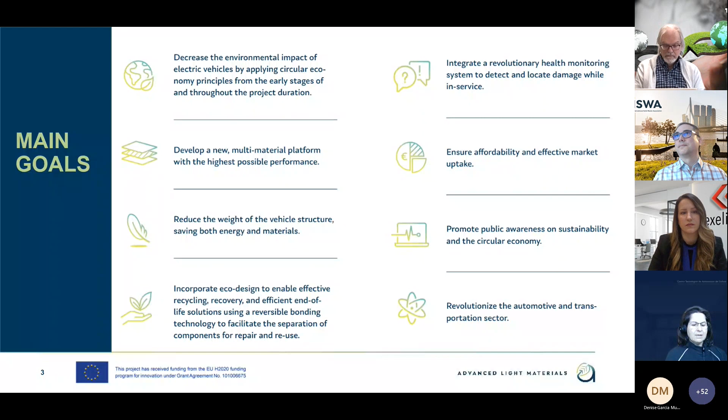As I mentioned before, we are 9 partners composed of 5 industries, some big ones like Ford or ArcelorMittal or BATZ, some SMEs, like Rescoll and Innerspec, 3 RTOs, CTAG, Fraunhofer ITWM and TNO, and 1 international association, ISWA.

This picture represents the ALMA concept, the ALMA approach, but we would like to go into detail, not too much detail because we have no time, but I'm trying to summarize the work we have carried out until now.

First, the first step was to adapt the structure of an ICE model, an internal combustion engine model, to a BEV model, a battery electric vehicle model. So this was the first step. When we had the first version of this electric model, we started the optimization of design. There are several key points that we have mentioned here.

The first one is that we have to choose the best material for the best location. This is really important because sometimes the materials are really high performant, but we are not putting them in the right way. So it seems very simple, but it's not the case. It's really important to choose the best material for the best location.

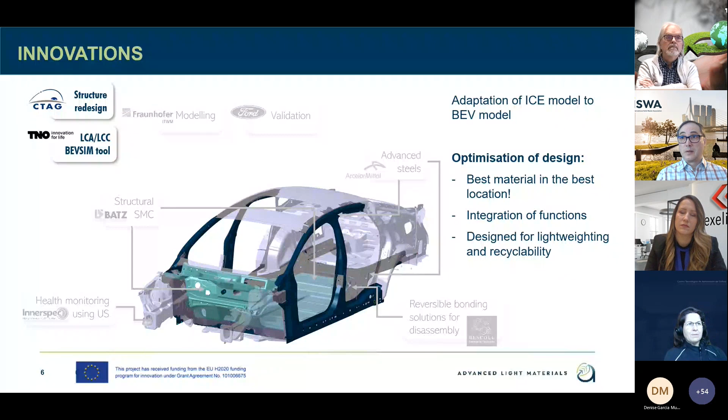Then we move to the point of the innovative materials. In this case, the 2 main partners were ArcelorMittal and BATZ. In the case of ArcelorMittal, they have developed high-performance new steels. We are using these new steels in 165 parts in this new body in white of the ALMA project.

In some cases we are able, as I mentioned before, to integrate functions. This is the case of the edge frame or the door panels, where we are able to integrate 2-3 components into one only component.

And we are also using structural SMC, sheet molding compounds, in this case developed by BATZ. The usage cases we have selected for this are the battery cover and the dash panel.

So we have a new design, we have new materials. So our partners, Fraunhofer and Ford, entered into action to develop and characterize, firstly, these new materials. Fraunhofer has developed the new material cards and compiled all the information and all the required characterization for these new materials.

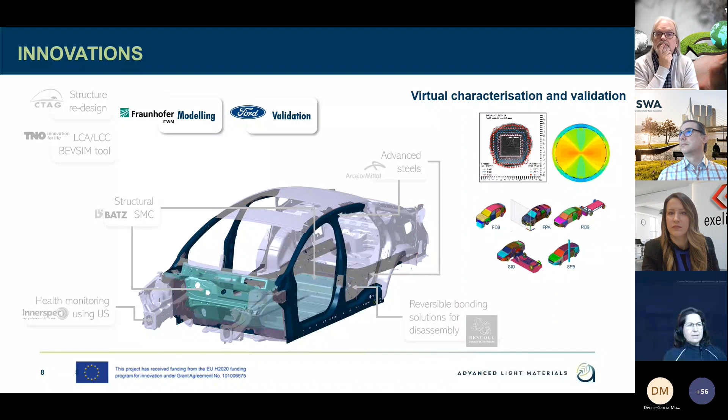So we have the design, we have the materials, but we also have parallel technologies, we can say, like this debondable adhesive. In this case, it's thinking about the end of life. We are going to use this adhesive to join the hybrid components, one component from steel and another component from SMC. The idea is that at the end of life, by applying high temperature, around 200 to 250 degrees more or less, we will be able to separate, to disassemble, in an easy way.

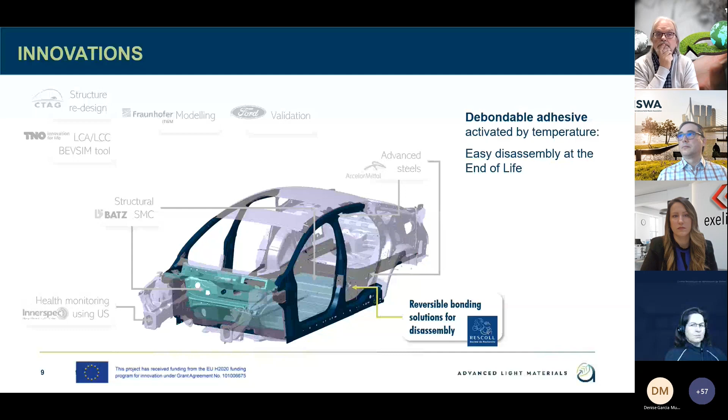And the other innovative technology concerns health monitoring. Our colleagues at Innerspec are developing a technology based on ultrasounds that is able to determine the condition of the part. So we will be able to determine if this part could be reused, or if we have to recycle it, or choose what is the function at the end of life.

So this is in general the approach we have in the ALMA project. At this point, with the work we have carried out until now, we can say there are two main results. One is the BEVSIM tool that my colleague Tom will explain in detail.

I think it's really a very useful tool that can help designers take into account the LCA and LCC parameters to have a better design of the part. But Tom will explain in 5 minutes. And I think I'll pass.

Yes, another good point is that in the work we carried out, we have reached a lightweighting potential of 23% concerning the baseline. So we are really happy with this, and we think the potential impact on future vehicles is really important.

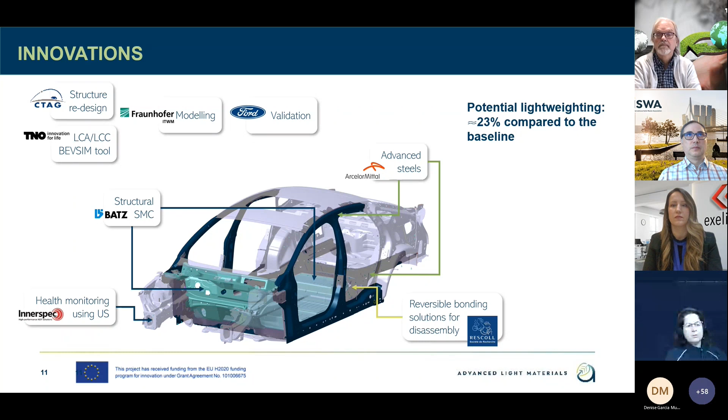So from my part, that's a brief introduction to ALMA. I really want to thank the consortium and all partners involved, because sharing results between different consortiums and projects is really important. This webinar is one example of that. We've developed activities this last year and will have more joint activities in the future. If you want to know more about ALMA, please don't hesitate to contact us through social networks, our web page, or otherwise. Thank you very much. I think I've respected my time slot, and that's all. Thank you.

Thank you, Raquel. I think we can pass to the next presentation, and then we can have questions together, maybe for this part, as it refers to the ALMA project. Is this okay with you, Raquel?

Yes. Great, great. So I would like to invite Mr. Tom Ligthart from TNO to present the BEVSIM tool. Yeah, and thanks Raquel for already introducing it.

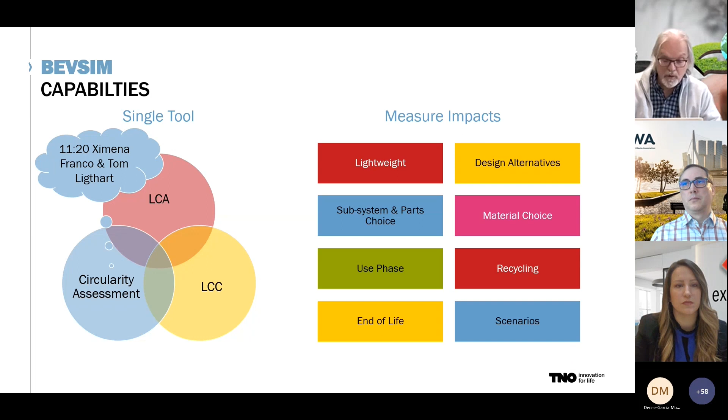All the life cycle phases are included: the raw materials, all the things you need to make a car, and also the processes to make parts from these materials. Plastics are included with compounding and injection molding, and metals with stamping, casting, and all kinds of processes, as well as painting and assembly of the car.

In the use phase, you can look at the energy consumption of the car, which depends, among others, on the weight of the vehicle—that's automatically included—but also maintenance and changing of parts during the life cycle.

In the end of life, there's a current scenario, but also a future scenario: recycling, but also energy recovery that avoids the production of materials and energy. That's also part of this tool.

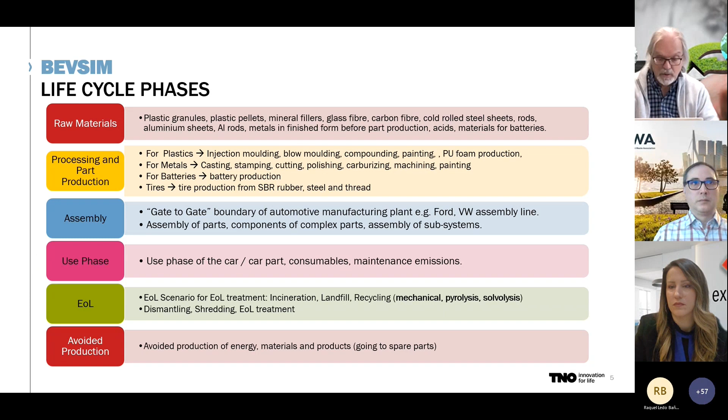You start with BEVSIM by first selecting a user design. There are already some there, and you can select one and edit this user design. But you can also do it at the subsystem level, for instance body-in-white, or even at a part level.

LCC is also part of the tool. There is a database in it with default material costs. User costs are also included, so that's the consumer. And you can edit these prices to suit your own needs.

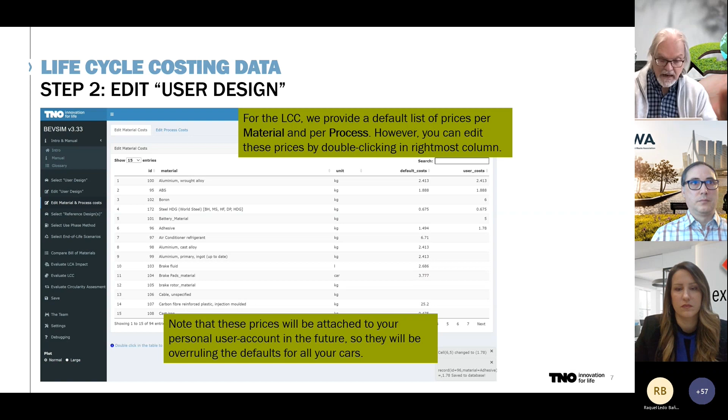In the user design, you can select the type of electricity or fuel in case it's an internal combustion engine, select consumer price, and other cost elements. That's then all used in both the LCA and the life cycle costing.

You can edit the user design that you've chosen. You can save it under another name. You can add or delete parts, and with those parts you can also select the materials and change them.

You can select up to 3 different processes to model the material into a part, and their efficiencies are taken into account. You only have to give the amount of material in the actual part, and the tool will calculate the final material needs.

It also accounts for the recycling treatment of the production waste, but also the end-of-life waste. That's all included.

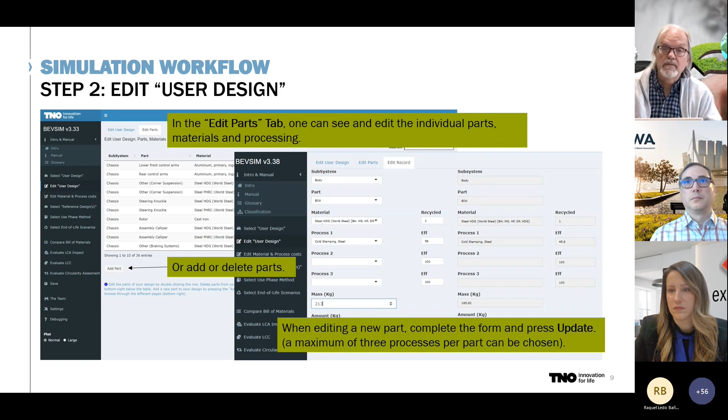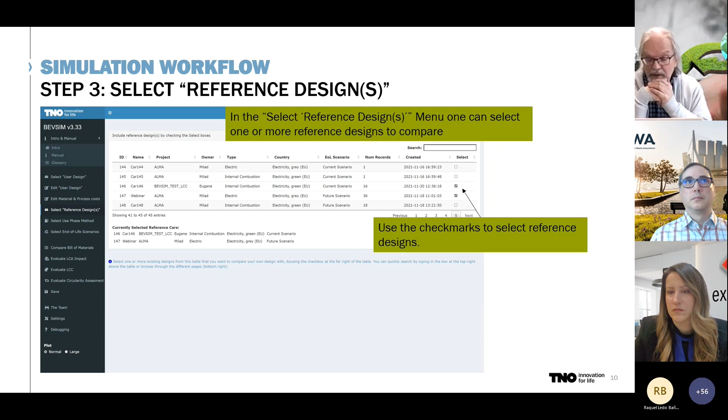Then you select up to 2 different reference designs with which you can compare your own user design. You then select the use phase method—for instance, which country do I take my electricity for the consumer from? Is it gray or green electricity, as that will affect the performance in the use phase.

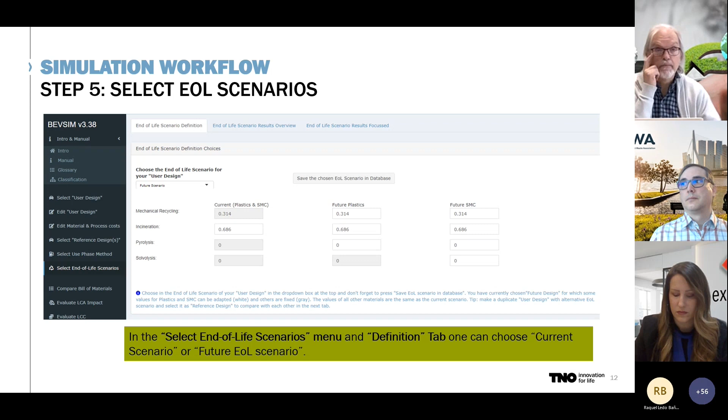The end-of-life scenarios are then selected. There is a current reference scenario, but you can also have future scenarios with chemical recycling for the plastics and the sheet molding compounds, because these can become more and more important in the automotive industry.

So indeed, lightweighting of these electric vehicles is of importance.

Then you can evaluate the sustainability impacts. You have a spider graph comparing up to 3 different cars, showing in this case the impact categories of ReCiPe, a much-used environmental impact assessment method.

But you can also go to a bar chart. If you're looking at the parts level, you can also look at the subsystems or materials—here an example of the parts level is shown—and then you see what is in the materials, what is in the assembly, end of life, etc. That's all shown.

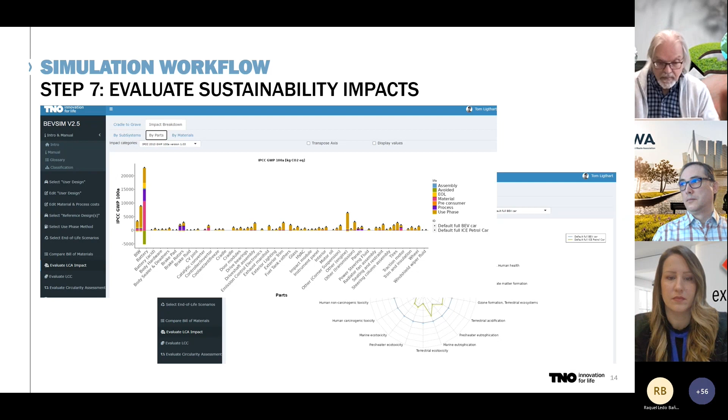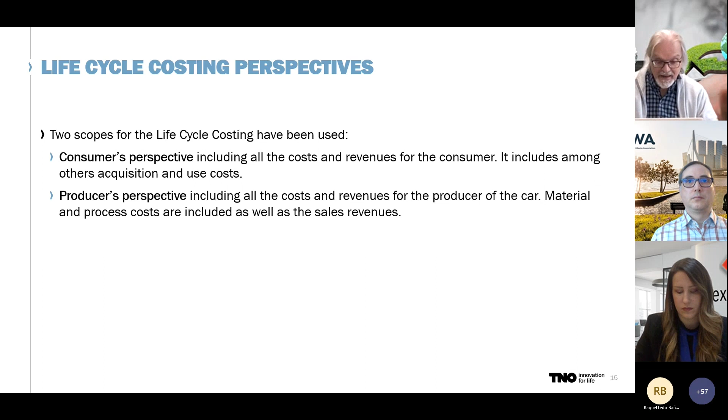For the life cycle costing, we have two perspectives. First, that of the consumer: the price paid for the vehicle, but also other costs like taxes and energy costs, and in the end, for the end-of-life vehicle, there might be some revenues. Also the producer's perspective, where you see material costs, processing costs, but also costs related to recall actions, and of course the revenues.

So that's also something you can take into account. For the producer, that's again things like the manufacturing costs and other costs, and of course the revenues that come from sales.

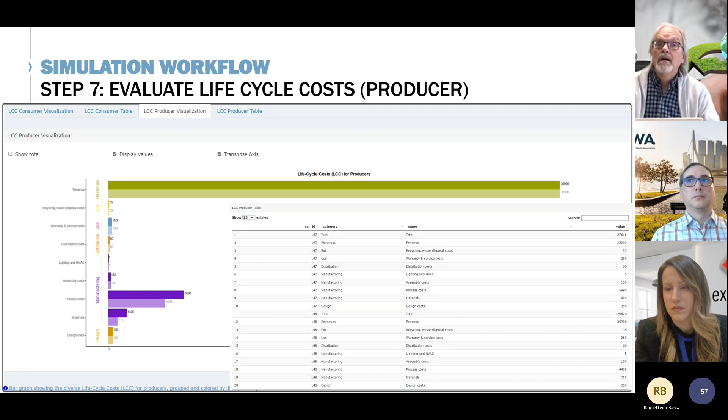Some closing remarks: BEVSIM is an online tool with which you can assess the environmental impact via LCA. You can assess the circularity, and also the economic impacts. It also has the consumer perspective, which might be a sales argument if you have better performance, for instance in the use phase.

It's specifically designed for non-LCA experts in the automotive sector. As said, you can model a whole vehicle, but also parts, and the tool gives consistency across all the LCA studies that you do.

BEVSIM is also accessible for third parties, and we can have a discussion for that on a case-to-case basis, and that can also involve a modification of BEVSIM.

This is the end of my presentation. I'll present you the ALMA team. Originally Rajesh Mehta was the work package leader for this, but he had to leave TNO. Now I am the leader, and these are the other people that contributed to building and designing and constructing the BEVSIM tool, and also to getting it available as an online tool for others.

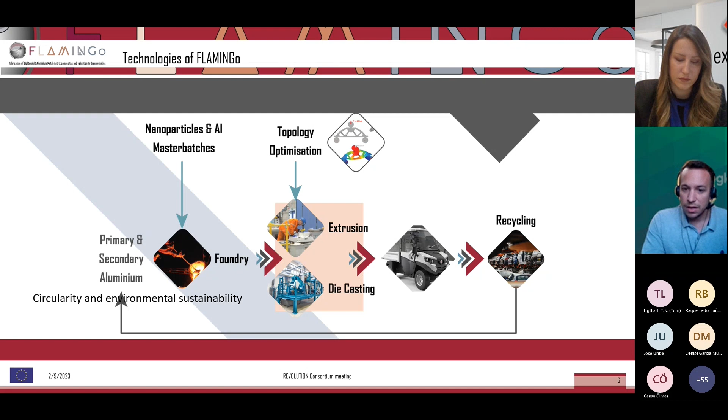The main objective is to validate and demonstrate the cost-effective processing solution for the automotive industry, not only for the electric vehicle but for all the process, all the industry, as well as following the principles of circular economy and cradle-to-cradle approach. As we said before, these improvements have positive consequences in the economic and environmental performance of the process.

We have three stages of objectives related to the development of technologies, demonstration activities, and market replication. Every partner, depending on their expertise, can address every one of the objectives.

The main specific challenge in this case is related to the improvement of efficiency and range of the electric vehicle through the production and use to recovery.

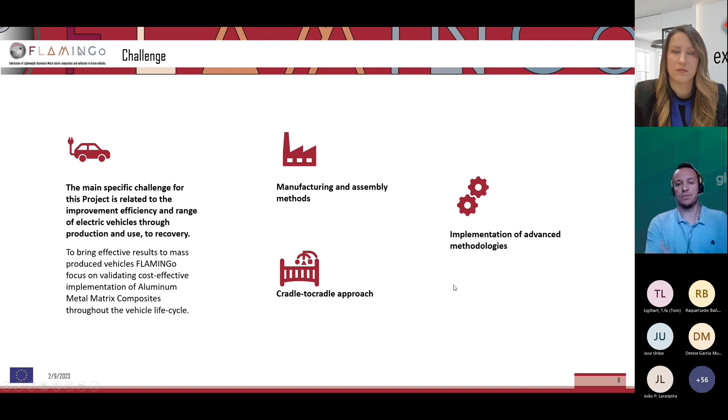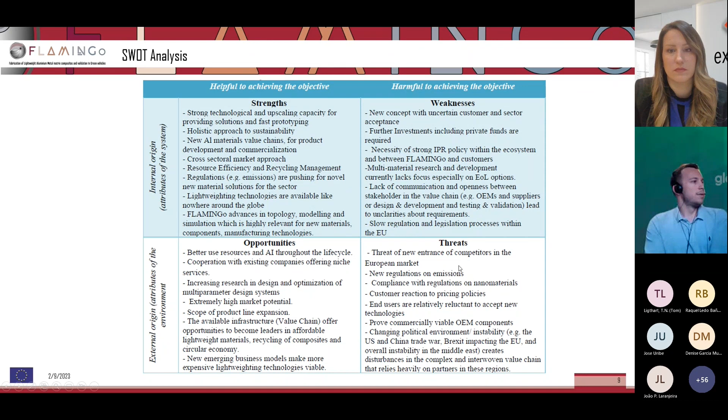The concept of the FLAMINGo project is that nowadays in the automotive sector, the two most used materials are steel and aluminium alloys, and aluminium alloys are an engineering solution to use less material in each piece, and also make these pieces perform better in the vehicle.

So with this new approach of manufacturing aluminum-based composite, the objective is to make aluminum an effective substitute for steel. Aluminum recycling is extensively done, and aluminum can be recycled several times. We can reduce economic and environmental impacts using these new aluminum alloys instead of steel, which is used nowadays in manufacturing these vehicles - not only electric vehicles, but across the whole industry.

The FLAMINGo project will have a duration of 42 months. The principal stages are: production of aluminum matrix composites and master batches to incorporate into the process; redesign of automotive parts and components using topology optimization to reduce material used in each piece; optimization of manufacturing methods and demonstration; and phase 4, environmental sustainability, circular economy and market issues. This is phase 4, but we work on it from phase 1 until the end of the project to gather all the information needed for the environmental assessment.

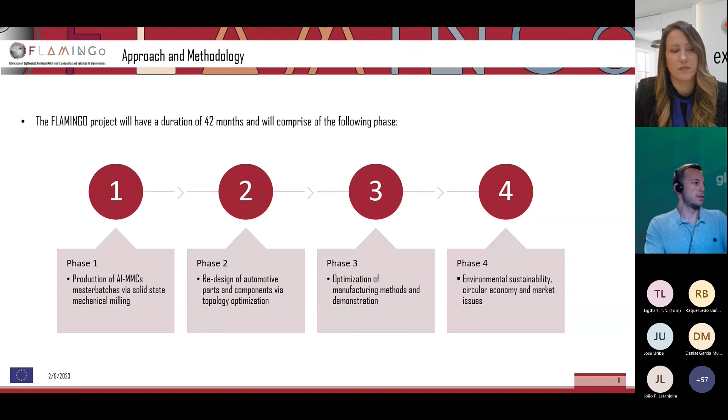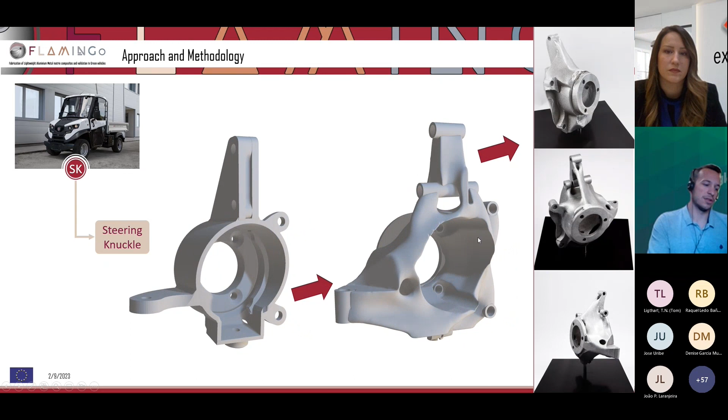Here is an example: the steering knuckle of the electric vehicle from Alke. You can see this vehicle from one of our partners in FLAMINGo, and this is the result using less material, designed with this new methodology. So this is an example, but the idea is to extend this approach to the whole body of the vehicle.

Now, the industrial need: the electric vehicle is supposed to be the next disruptive force for transportation and technology. Electric vehicle manufacturers are convinced that lightweighting is a major topic because it implies less energy to move the vehicle, and it's good not only for the cost of moving the vehicle, but also for the cost of manufacturing and the reduction of environmental impact in the manufacturing process.

So FLAMINGo aspires to develop a group of integrated technologies that will allow wide use of aluminum metal matrix composites across the whole automotive industry, using advancements in technology, topology optimization, and recycling processes.

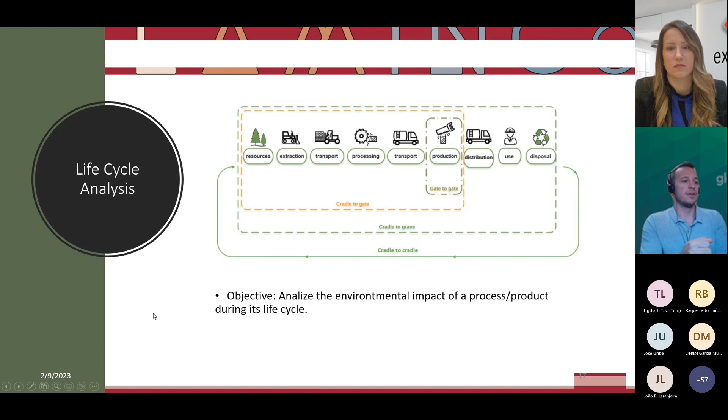So here we have a super quick life cycle analysis approach. We all know that LCA is a technique for determining the environmental aspects and potential impacts associated with a product on the global atmosphere, water, and soil in the system nearby the study case. We are working in a cradle-to-cradle approach because the objective is to analyze the environmental impact of the whole process.

We work with inputs about raw materials, energy, and water, and with these inputs we try to figure out the performance at each stage of the manufacturing process: production of raw materials, production of the vehicle components, distribution of the products, use of these products throughout their life cycle, and end of life, including possibly recycling the components of the vehicle. The outputs will be atmospheric emissions, as in every life cycle analysis, wastewater, and solid waste impacts within the project - the typical environmental impacts: global warming, ozone depletion, acidification of soil and water, and the full list of environmental impacts in the life cycle analysis.

We are working on life cycle cost analysis too, not only life cycle impact, because we have to achieve the lowest cost of manufacturing this kind of vehicle, while being consistent with quality and function, without compromising these topics. It's interesting - we have to collect data about the whole manufacturing process so we can get cost data too, and perform this life cycle cost analysis.

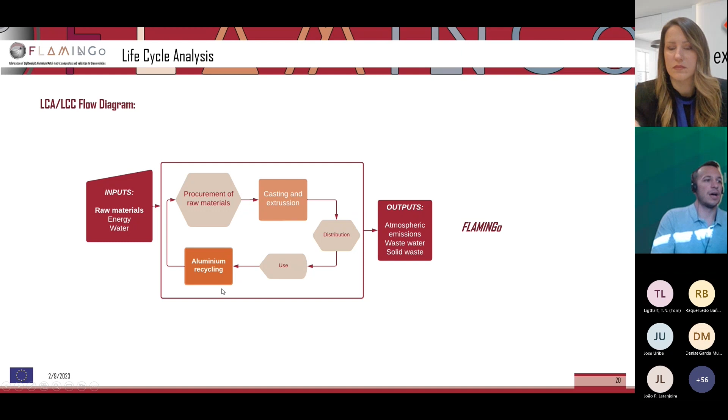This is a flow diagram of inputs: raw material, energy, and water. We have the procurement of raw material, casting and extrusion, distribution, use, and aluminum recycling, and the outputs, as we said before.

Now we have a quick review of the aluminum value chain. As we said before, this is a critical topic, because it will determine the impact of the next generation of vehicles, electric or not.

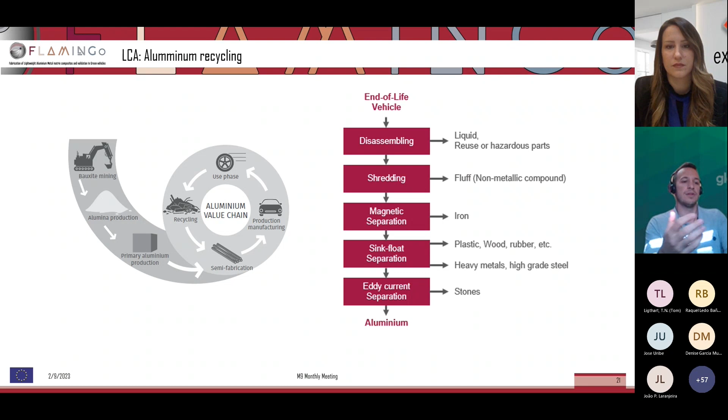At end of life, we have disassembling of the whole vehicle for separating liquids and reuse or hazardous parts, shredding for separating fluff and non-metallic compounds, magnetic separation for iron, sink-float for plastic, wood, rubber and heavy metals like high-grade steel, and eddy current separation for stone. So we have the aluminum, which can be used for the next generation of vehicles as secondary aluminum, reducing the environmental impacts of the manufacturing process.

To reach these goals, the project considers all the steps from cradle to cradle, like the component design, production of nanoparticles, and then the casting of the components and extrusion of profile with the new aluminum alloys. And then the use of this component for substitution of steel and aluminum parts in electric vehicles, and recycling, to reduce the economic and environmental impacts of the vehicles manufactured.

And the conclusion: the project is still under development. We have data available from the partners, but it's not the final data. This lack of data allows us to analyze more scenarios, and we are working on it, drafting the data that we don't have yet.

In conclusion, we need to continue collecting this information to complete the LCA and LCCA assessment, with the objective of confirming improvement in performance in economic and environmental aspects of the vehicle manufacturing, using all the enhancements in materials and procedures provided by the project. In these topics, there are no other companies or consortiums that publish this data of life cycle analysis, so this is an opportunity for transparency in these topics.

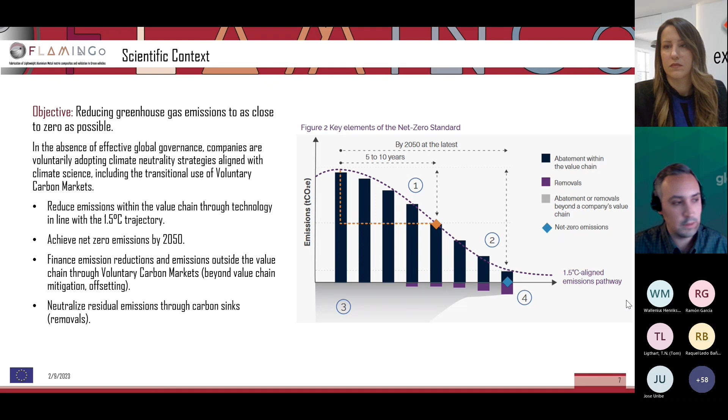Given this context, it is important that we see the circular economy as a tool to achieve net zero. Usually we don't see circular economy as a tool to achieve net zero, but we want to get into depth about how circular economy can be a tool.

According to a study by the Ellen MacArthur Foundation, the initiatives we have developed so far to mitigate climate change and reduce greenhouse gas emissions cover only 55% of global emissions. Examples include energy efficiency initiatives and the transition to renewable energies. The other 45% is related to production and manufacturing, and it is there where circular economy is proposed to help.

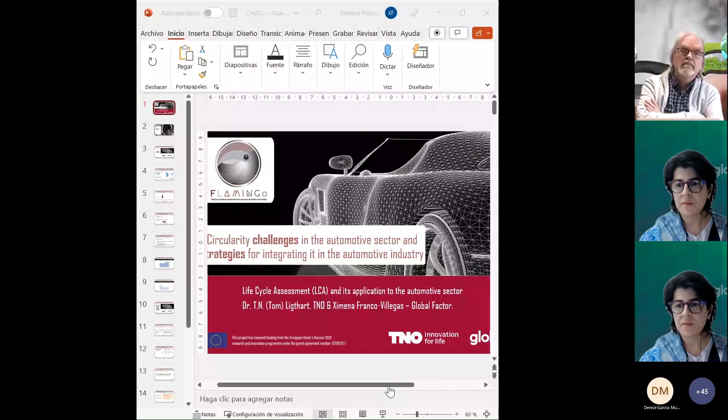Well, today we are going to go a little deep into the material analysis and the circularity challenges that the automotive sector presents, and the strategies for integrating circularity in the automotive industry. This is a joint presentation with my colleague Tom Ligthart, who just presented before, from TNO and Global Factor.

We are talking about a contextual framework, and then circularity in the automotive industry, with some facts and figures and some takeaway messages. In the contextual framework I will be very quick - this is the last slide my colleague Jose just presented, talking about the big opportunities the circular economy presents for net zero strategies and the decarbonization of sectors such as the automotive sector.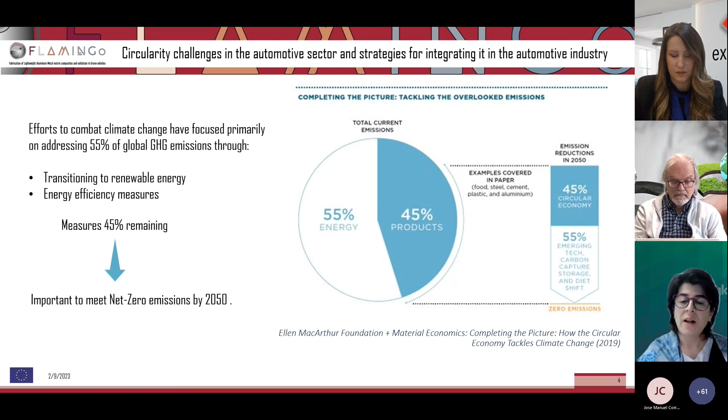Based on this picture, we can also talk a bit about the main trends of the automotive sector. In 2022, a study was published based on a very big consultation with automotive stakeholders worldwide, and these are the main trends identified for the sector by 2030: more than 50% of vehicles in the market by 2030 will have some form of electrification, autonomy, connectivity, and mobility services.

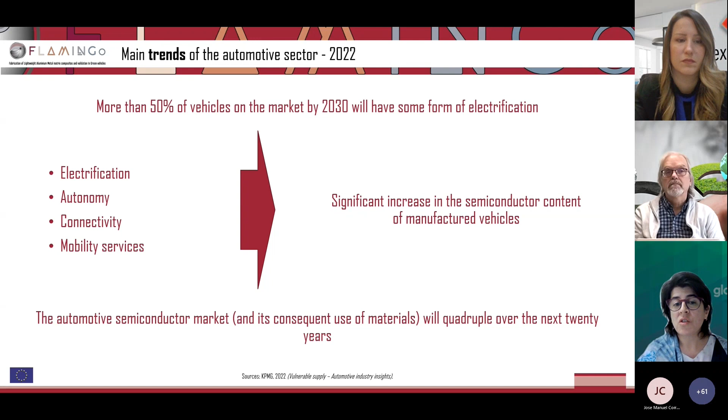Mobility services are also a trend for 2030, and those are some kind of measures based on the circular economy concept. Also, this means there's a significant increase in the semiconductor content of manufactured vehicles, which is very important to take into account regarding the materials issue. The use of these materials for the semiconductor market will be 4 times the current market over the next 20 years - a huge change in materials demand.

The current challenges for the sector are, of course, the high dependence on the supply chain - shown by the example of the microchip shortage we are still suffering. Material shortages, geopolitical uncertainty, and global health risks are still a big challenge for any sector, along with increasingly stringent environmental regulation with decarbonization targets, and finally scarcity in the labor market. This can be synthesized as a high vulnerability of the global automotive supply chain.

So what could be the strategies for integrating circularity in the industry? This is a general overview of the strategies, but we will go deeper into these with Tom's intervention. There are 4 big strategies - we need to develop new models of collaboration between value chain players.

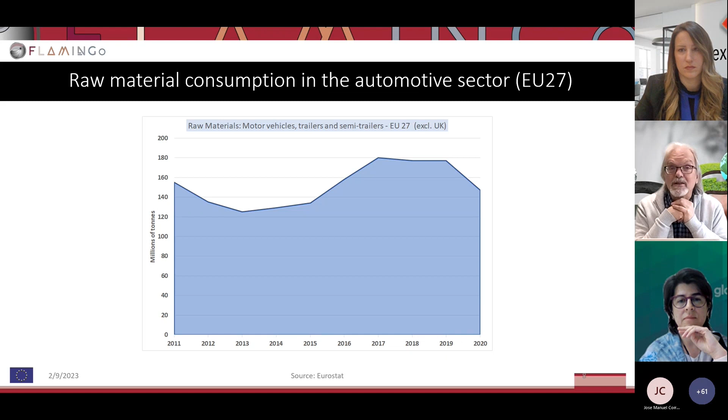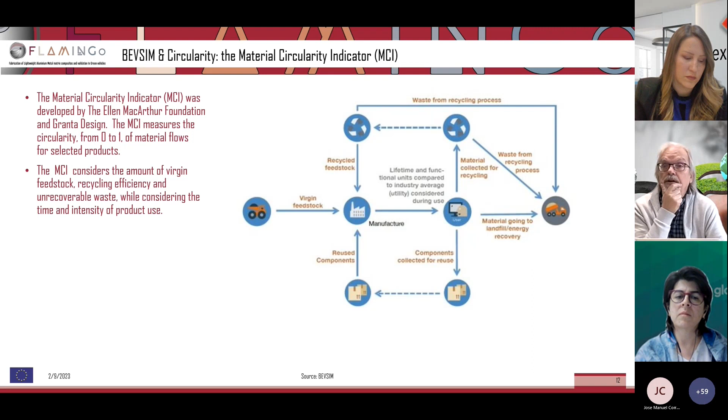And of course, it has to do with the fact that there are lots of metals, and for metals we have a well-established recycling system, also driven by the value and because of the properties of the metals. So with that respect, circularity is already at a level of 0.6. Next slide, please.

Then we can also look at the MCI and LCA results. Of course, to keep materials in the loop, you also need input of energy, for instance, for steel in the electric arc furnace to remelt it and refine the waste steel. The same applies for aluminium, but especially with plastics, you have mechanical recycling, but you're moving towards chemical recycling in the end.

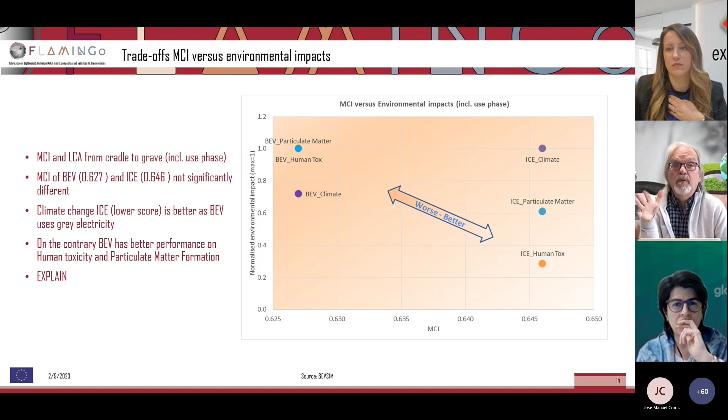What we can also do is exclude the use phase, that's in the next slide. So then you see that, especially because of the battery included, but also in this case because gray electricity was used, the environmental performance of the battery vehicle has the higher score. So in this case, it's the lesser environmental performance, the highest impact, the somewhat lesser performance on the environment. But of course, because the use phase is important, you have to go to green electricity, and these kinds of effects have also been shown in other studies. Next slide, please.

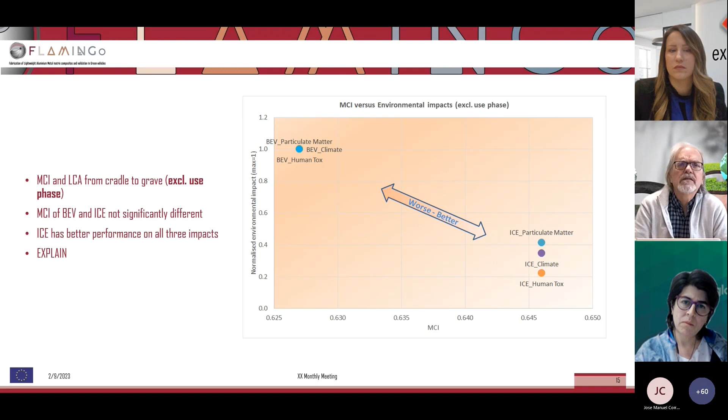The factor A, for instance, is of importance. It can have values depending on the type of market between 0.2 and 0.8 by default, and if you have 0.5, burdens and benefits are equally shared between the life cycle delivering the waste product and the life cycle using the recycled materials. So that's also a type of allocation. Next slide, please.

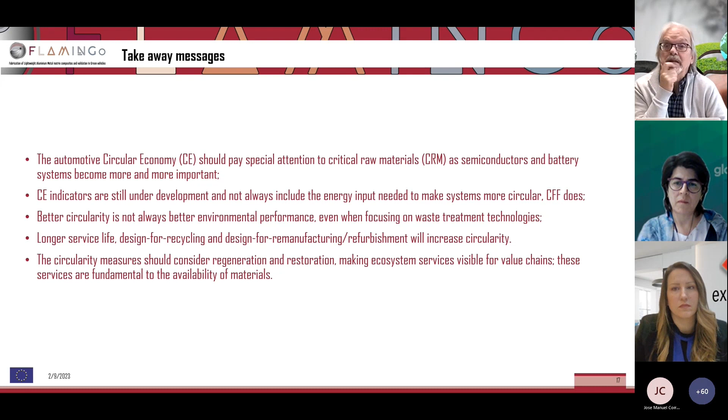And as already mentioned in this presentation, giving a car a longer service life, design for recycling, and design for remanufacturing and refurbishment are also important to increase circularity. A last message: all these circularity measures should also consider regeneration and restoration, making ecosystem services visible for the value chain. So take the environmental performance also into account, not only look at circularity, but use them all. So this was the presentation by Ximena and by me.

Thank you very much to both of you. I see in the chat that two questions have arrived. The first is for both of you regarding plastics usage in the car industry: how does the industry face the move towards bioplastics, and is plastic an environmental impact hotspot?

It could be an environmental hotspot when the mass of materials is increasing. Also, with compounds, mechanical recycling is not always possible, it's very difficult. So you have to go to chemical recycling like dissolution, solvolysis, pyrolysis, but still you have losses there, and you also need to input energy and materials for this type of chemical recycling. In other sectors that use plastics, like packaging, there's now really a focus on mono materials but also design for recycling, so that different polymers can easily be separated mechanically and recycled while maintaining the quality of the plastic, because that's an important factor. You don't want downcycling, or at least you want to avoid it as much as possible.

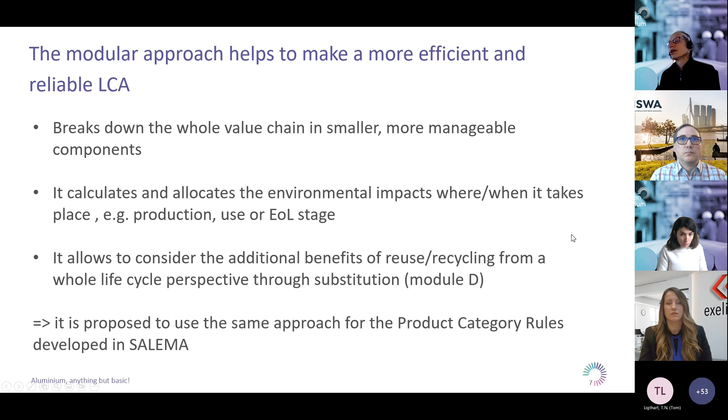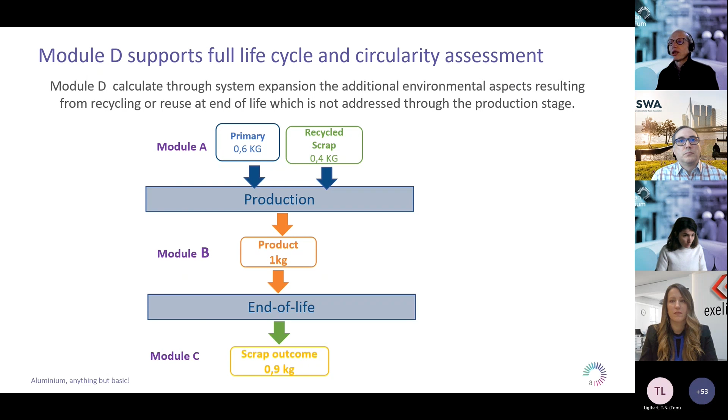Let me explain with the next slide how it works. If we have a product of 1 kilogram, to make it simple, typically in Module A we can have different sourcing - we can have primary aluminium on one side, but also a fraction coming from recycling. At end of life, you usually have quite high recycling rates because aluminium, or other metals, are valuable and interesting to recycle. But you see a discrepancy between what you get at end of life and the recycled content, because today scrap availability is the bottleneck. So the average recycled content in products is usually lower than the end-of-life recycling rate.

To address that discrepancy, through Module D you address the net surplus - the net production, could be a consumption, but usually it's a production. You reflect the additional benefits by calculating the substitution you can achieve through the recycled material generated from the full product life cycle, because you are a net producer of secondary materials. You avoid double counting by using this net flow of scrap generated at end of life.

This is the logic we use in the building sector, and we propose to use it also in the SALEMA project, which will now be highlighted by my colleague Francesca. Thank you, Christian, and hello everyone.

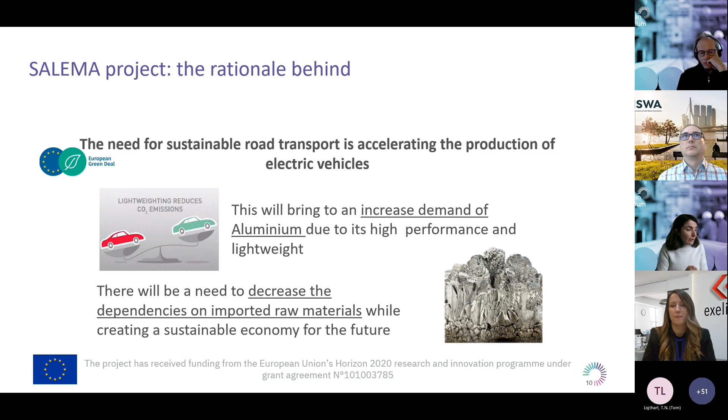This is the rationale behind the SALEMA project. The scope is to reduce dependency from primary magnesium and silicon in aluminium alloys for electric vehicles. Magnesium and silicon are two alloying elements extremely common in the vast majority of aluminium alloys, because they confer important properties to the final product. We reduce this dependency in two parallel ways: by reducing the amount of silicon and magnesium through new novel alloys, and by increasing the recycled scrap metal rate in the aluminium alloy, so magnesium and silicon come not from primary sources but from recycled scrap.

Now, what's the role of European Aluminium? That's why we are here as well. Beside communication dissemination and looking at the policy landscape, we contribute by developing a product category rule for this project. So what's a product category rule?

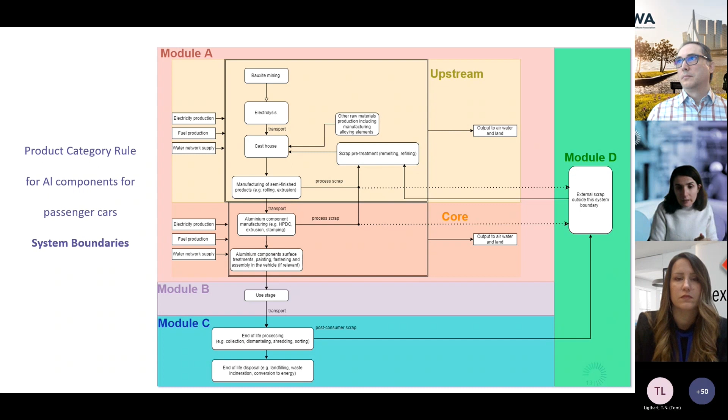Thanks to this modular approach, it's possible to develop different kinds of EPDs - so cradle to gate, looking only at module A, or a cradle to gate approach plus the end of life stage, including the additional environmental aspects resulting from the end of life stage.

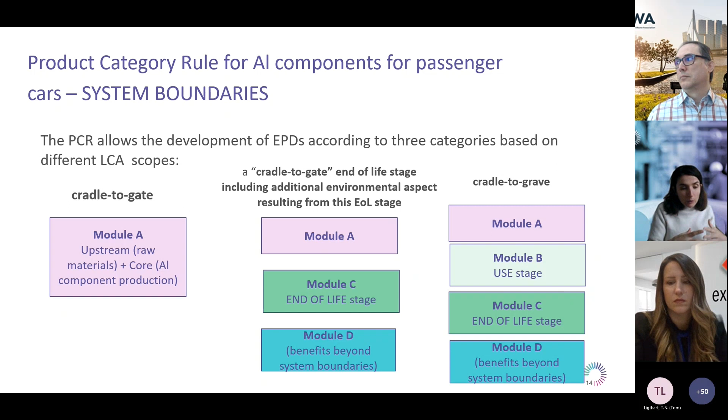So we have module A, module C, and module D, and then an approach really cradle to grave that looks at the whole, the most complete picture of it, also including the use stage.

As I mentioned before, the SALEMA project is really looking at critical raw materials such as magnesium and silicon. So for us, it was important to include alloying elements in the calculation of the environmental impact. Christian mentioned that European Aluminium already has data sets developed for aluminium, and there's a link here you can find, or you can send us an email.

But most of the time, it doesn't really consider alloying elements - it considers it as 100% aluminium. So we decided to add this in the product category rule because it's really important as well for the project.

I'm out of time, I will be short, but there are two examples as well, similar to what was seen before, to see what is the added value of considering this modularity approach with module D.

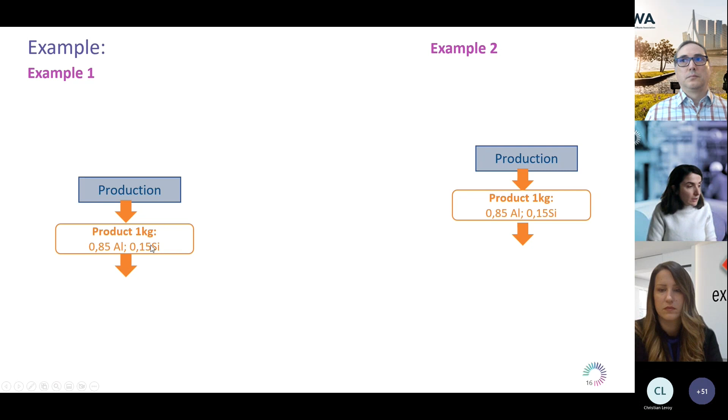So we have two examples in which we have a product with aluminium and silicon. We put only silicon, but of course it's exemplary for different alloying elements. So we have 1 kilogram of product, and two different sources that we consider. In example 1, we have a lower amount of recycled scrap, and in example 2, a higher amount of recycled scrap. Then the same amount of scrap is recycled at the end of life.

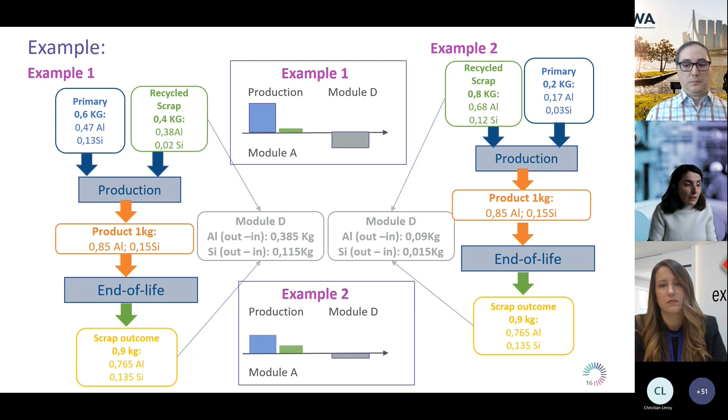When adding module D, it really gives an idea of the whole impact and the different impacts that these two examples give on the whole life cycle, and that's why we consider it important to have a full picture by adding module D.

So the conclusion is that we believe by using a modular approach, the LCA can be a more flexible, transparent, and standardized process. Adding module D in this modular approach really can give a full picture into the additional benefits coming from recycling from outside the system boundary.

This was applied as well for the product category rule developed for the SALEMA EU project. We only do the product category rule, and then the LCA will be - we developed this in collaboration with members of the consortium, but the LCA will then be developed by Eurecat, which is actually presenting for another project just after us, from Violeta as well from Eurecat. Additional alloying elements have been considered as well in this product category rule. Thank you.

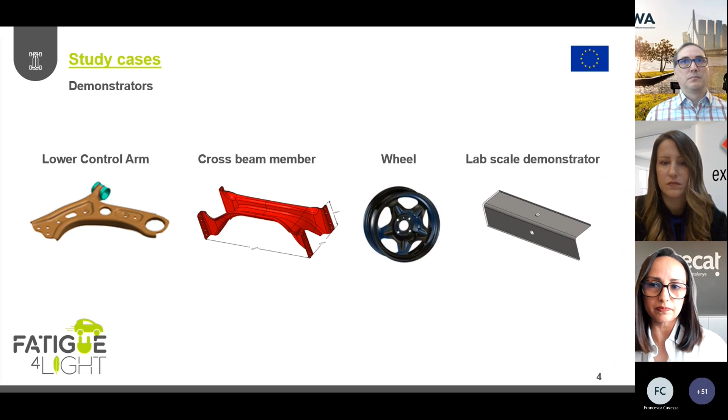At Eurecat, we developed a new methodology for eco-design or design for circularity some time ago, and we applied it to different projects we're working on. One of these projects is Fatigue for Light, the other is Marble, but we're not presenting that one here. For Fatigue for Light, we use this methodology that follows four simple steps that actually follow the Deming cycle, which is known by a lot of us, and it's easy to think about: plan, do, study, and act.

Following this methodology, we have four steps that are easy: where we identify different hotspots or aspects that we have to really pay attention to, that will get us bigger results than others. Then we establish different strategies based on eco-design and on what we found in step 1. After step 2, where we have the strategies, we have to readapt the strategies to the technical aspects and requirements of whatever we are designing. Then in step 4, we define concrete and specific eco-design actions to apply.

More in detail, in the first step, what we do is based on a benchmark analysis and a simplified and preliminary LCA and LCC. After having these results, we can identify these hotspots and the life cycle stages, and then correlate these hotspots with the life cycle stages to find where we have to pay attention.

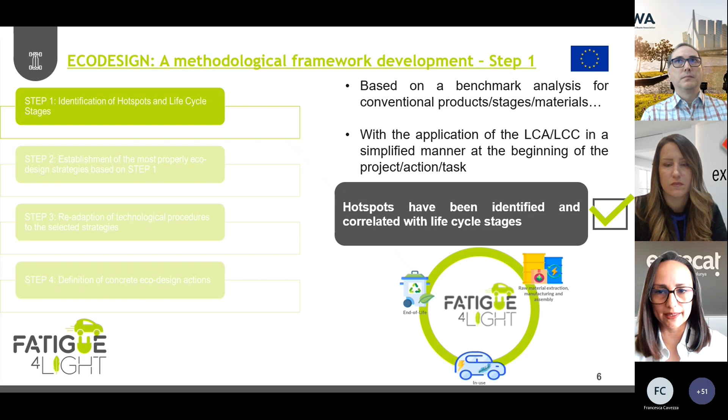After having these hotspots defined, we can define the strategies we're going to pursue. In this project, since our main objective is lightweighting, we focus mainly on that, but we also try to pay attention to other objectives like design for maintainability, lifetime extension, finding substitutes for critical raw materials, and considering second market resources for this.

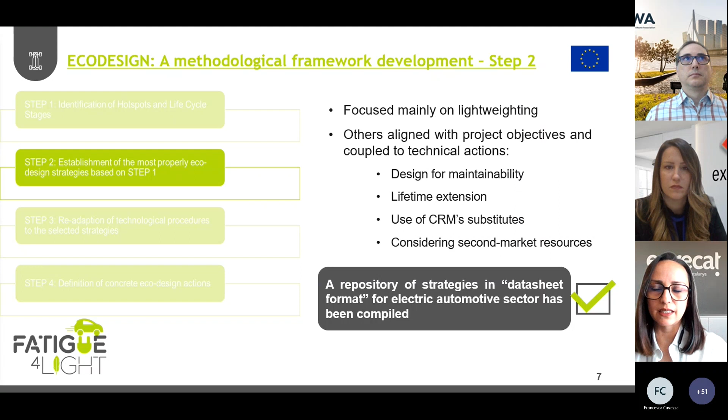So after going through step 2, we have a repository of strategies in a datasheet format that we can apply to other projects as well, as long as they're electric vehicle projects. Having this repository of strategies, we had a webinar or workshop where we invited all our partners from Fatigue for Light, and we tried to familiarize everybody with the eco-design concept so we could come up with more ideas and readapt the strategies we had at the beginning to the technical aspects and requirements that only the technicians can know.

So then we had a more accurate set of strategies. After the strategies, we defined specific actions to go through throughout the project, as well with all the partners that were participating in the webinar.

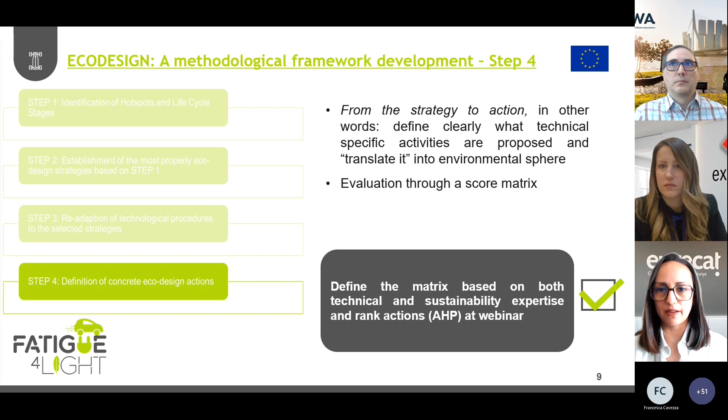After having a list of different specific actions we can go through, we also applied an analytical hierarchy process, which is a methodology to rank things in order of which one is more important, feasible, and viable at the same time. So with all the partners, we ranked these actions and got a list of actions to follow through, and since they're ranked, we can identify the most important ones.

Then we have to do another LCA and LCC and compare the results with the first ones, or the preliminary LCA and LCC that we started with.

So then with the AHP, the analytical hierarchy process, we have a score for each of the strategies, and then we did the same for the actions, giving us a score for the actions, and then a final score combining the two previous ones. And that score is the one that helps us put the actions in order.

So that's for the eco-design methodology. Then, to show you the scope we are following in Fatigue for Light, we have three life cycle stages considered in this project: one that is raw material extraction, manufacturing, and assembly; then we have the use phase; and the end of life.

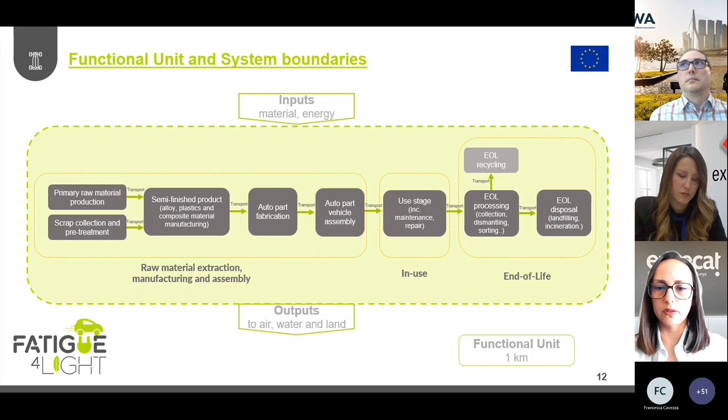Of course, we are following a cradle-to-grave approach on this project, and for this we have a functional unit of 1 kilometer. We have these system boundaries, which is very general, as you can see on screen. All the processes from raw material extraction, manufacturing, and assembly will be specific for each of the demonstrators once we have the inventory for each of them, but just to show you, this is the general one for all the demonstrators in the studies.

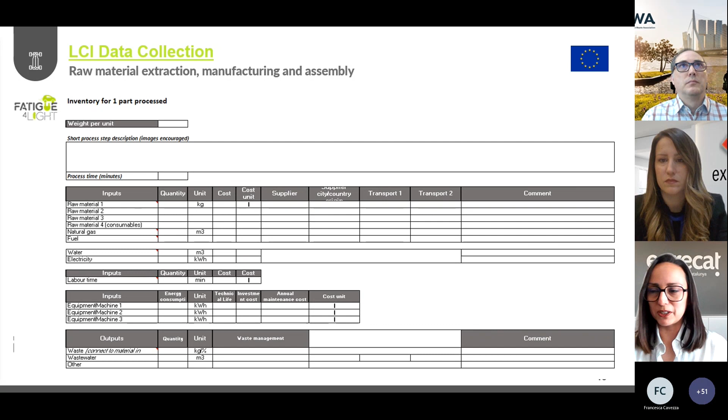I think I have nothing else there. Right now we are collecting the data for both the LCA and LCC at the same time. We've been sending this template to all our partners and getting some answers from them. Sometimes it's easier and sometimes it's kind of hard to get an answer, and other times it's hard to fill in this table the right way, but we're working on it. We have a very good consortium, so we're all working on it. They're all implied in it, thankfully.

So after having all this data for the first stage, that is raw material extraction, manufacturing, and all this, we then have the use stage and the end of life stage that are going to be based on literature.

For the use stage, we're going to use two references: one from the CSA Group, which I think we all know, for auto parts in general, and then the European Environment Agency document or guidelines, which are specific for electric vehicles. We're going to use these two for the definition of the use stage, which will give us the lifetime driving distance and the energy consumption throughout the life.

And then for the end of life stage, we also have to define the different percentages for recycling, landfilling, and energy recovery, based on literature for this too.

After applying this eco-design methodology and the LCA at the beginning, we found that again the LCA data collection is challenging. It's been a hustle and it still is.

The difficulties again are the definition of the use stage and the end of life, because it's accurate to get a definition from literature, but we are worried that it's not real at the moment this information is applied. If we applied it right now, I'm sure it's going to be more or less real because this literature will be up to date, but at another moment it will be different. As always in LCA, this happens often, but still it's a worry.

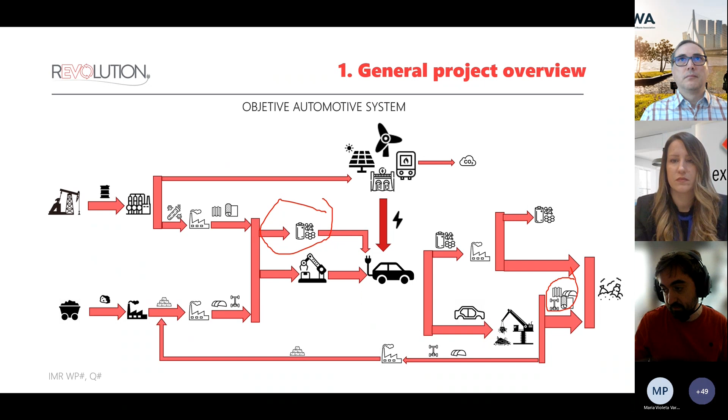In the Revolution project, what we are working on is to maximize the recycled material into this system, the electrical vehicle system. For this, we will deploy new innovative material, deliver safety into the cars, try to reduce the weight of these cars, and also the recyclability. In addition, we will design this new piece with the new material with easy disassemble design. However, one of the principal problems with these new recyclable materials is the material consistency.

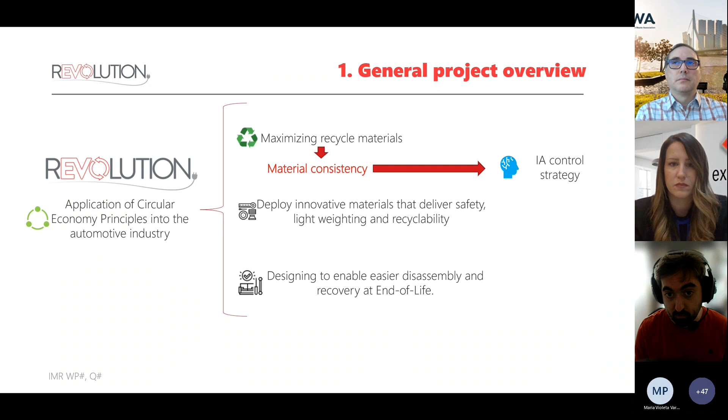As other people have mentioned before, this material has the problem when you try to recycle and reuse it - it's quite difficult to reuse because they change the characteristic of the material itself. So in this project we will use an AI control strategy in order to avoid this problem with the consistency of the material and increase in this way the recyclability of the materials. So we will move to this new system, reducing the amount of material that goes to the landfill, increasing the recyclability, reintroducing it into the system, and try to reduce the impact of the electrical vehicles.

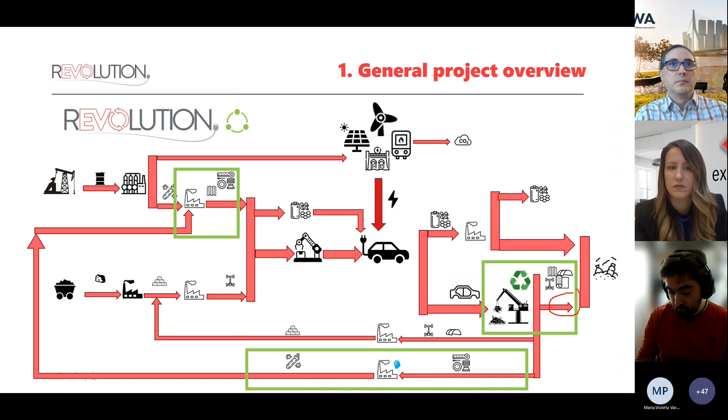So for this purpose we are working on 4 cases. 2 of these new pieces of the car made of this new material will have steel substituted for a new polymeric material, recycled one. We are still working on choosing which material is better for this purpose. Also, we select 2 other pieces made of polymeric material and substitute them again for recycled material, also with the objective of reducing the weight of the car.

From our LCA process, we try to do a cradle-to-cradle strategy in order to take into account all the manufacturing steps, the use and the end of life strategy, also the recycling step, in order to have everything. What we're going to do is compare the conventional system, the conventional way to produce this piece, with the Revolution system.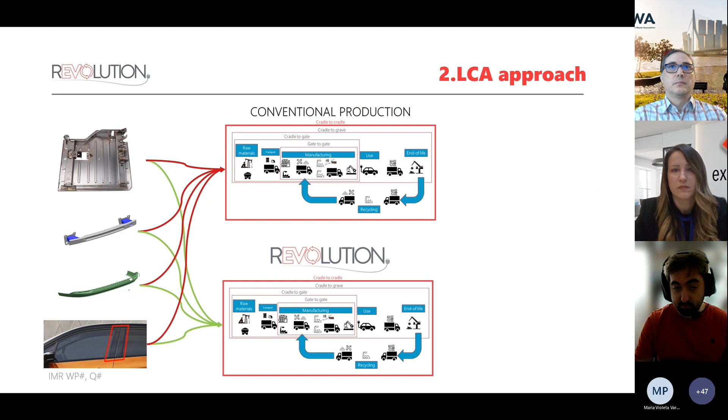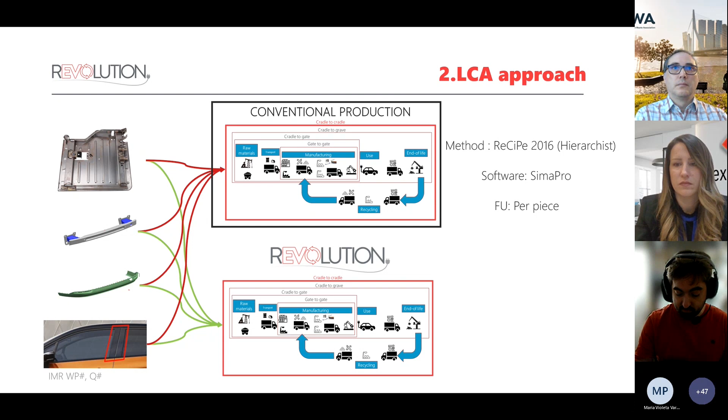So in order to do that, I start with the conventional production system because we don't have any information, or there is no LCA specific done for this piece. So I decide to go with the ReCiPe methodology because I have more experience with this methodology. Also, we're using the SimaPro software, and all the impacts are being calculated per piece.

When I started to do all this conventional LCA production, I said I will start asking for all the information I can from my partners. The problem was that my partners are quite limited - most of them are in production of some material, some manufacturing, and we also have a partner in the assembly part. But we don't have information on raw material production, or about the use of the car, or even the end of life.

So the principal big problem is I don't have information for most of the system. What I do is ask my partners if they know any information for the parts we don't have. Also use databases like Ecoinvent, World Steel, or Plastics Europe, in order to fill this gap of information. And also ask about the distance of the transport.

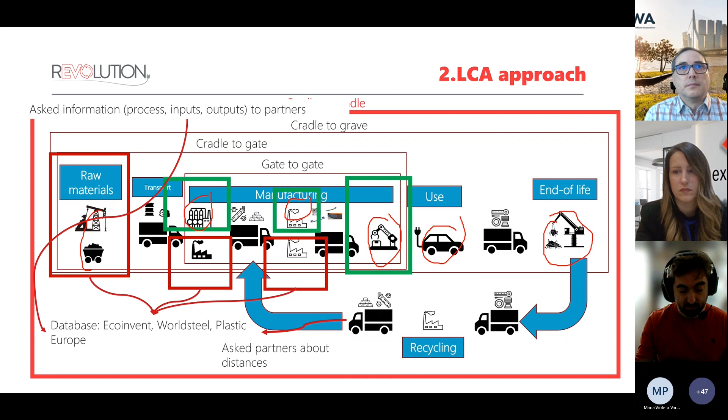Why? Because most of the partners in this project are across Europe - we have people from Spain, Turkey, Germany, Finland. So at the end, this transport step will be really important. We need information about how long these materials are moving around Europe in order to take this impact into account. So when I took all the information they could give me, the first study I did was a cradle to gate instead of cradle to cradle.

This is because I don't have information on the end of life or the recycling step - none of my partners are working on it right now. So in the cradle to gate system, from the LCA summary, I saw that the raw material production is the principal source of most of the impact, with global warming being the most important one.

The transport material starts to be really important when the distances are quite high - not because it's not an important step, but because of the raw material impact.

One thing that surprised me is the assembly part. The metal material is welded to the chassis, so this impact affects the workers a lot from our point of view. All the electricity, the fumes produced in the welding have an important impact on human toxicity.

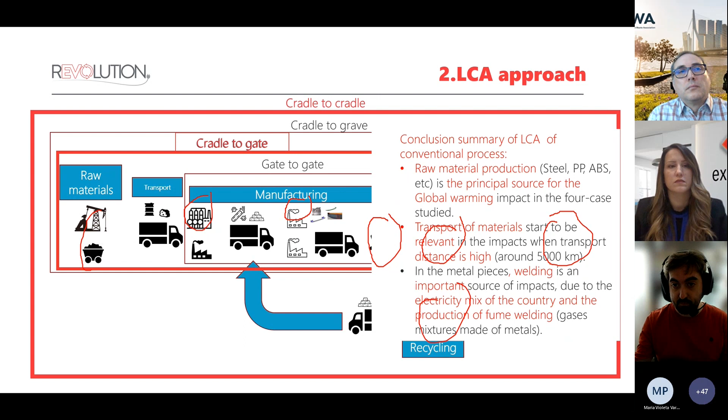This is important because at the end we will try to change all the metal parts with polymeric pieces, and for this polymeric piece we will attach it to the chassis with glue or adhesive. So maybe it's not just the material itself - how the material is put together with the car is also important.

Our conclusion is that the machinery impact is not taken into account. What I mean is, when I ask about information on the process - how much material they are using - I found that most of my partners have a lot of information, but not everything you would need. The machinery is not taken into account because they don't know how much equipment they use, how much metal the equipment has.

I decided not to take it into account because at the end we need to start having some information about the process. Maybe this will be added in the future, but right now I don't take it into account.

Also, when I finished this analysis, I don't know if I'm going to take into account the impact of using this piece in the car. What I mean is, okay, the car will be lighter, but in order to take the effect of changing this piece with new materials, I need a lot of information, or the people who build the car need to do a lot of investigation to see if the weight reduction produces less impact because they use less energy.

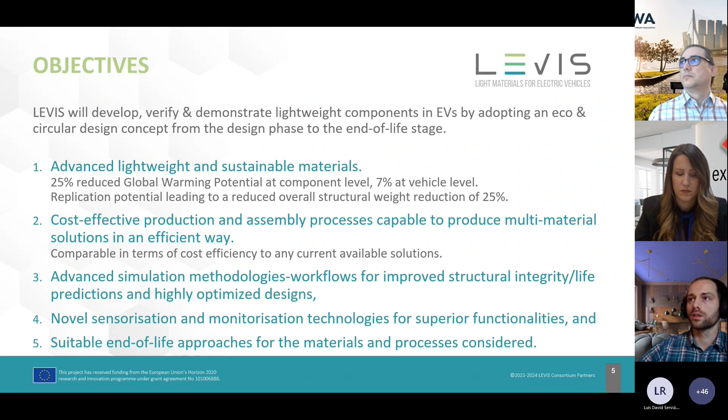Going further ahead on the specific life cycle strategies we use in LEVIS - first I want to go over the eco-design approach. We start with circularity at the start of the design process, done in the same time frame as the design of the products. We developed a tool called the IEDGE toolkit, which stands for Integrated Eco-Design Guidelines and Evaluation, meant to be used during the design process.

If you consider the design process as a 5-step method - product planning, research, design concept, detailed design, and then the final solution - the idea is that this toolkit helps you during the first 3 phases: product planning, research, and concept design. The detailed design and final solution come later in the design process, but we want to bring the concept of circularity and circular economy in during the first stages of the design process.

So how do we do that? As mentioned before, we have developed an eco-design toolkit, and this toolkit is made to be integrated into the design process. So it's not a separate part. What I mean by that is that it does not focus solely on the environmental aspects of the design phase. Most of the time you have a separate part designing only the technical aspects, then a separate part looking at the economic aspects, and a separate part looking at the environmental aspects. We wanted to have it integrated all together so you can make decisions based on these 4 focus areas: environmental, economic, technical, and social.

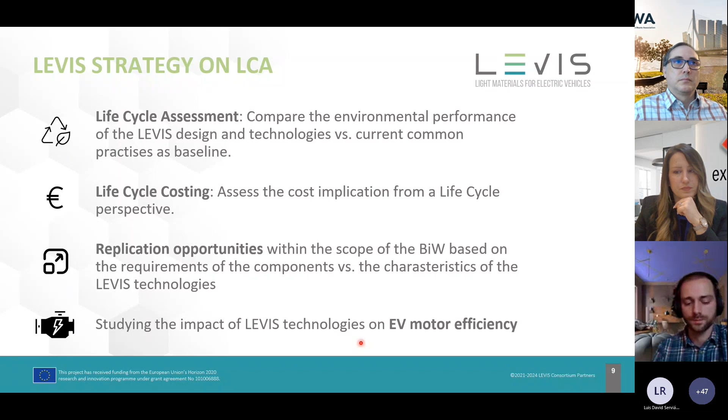Going over the life cycle assessment, I'll do this very shortly on how we do it, since it's been mentioned in the other projects before, a lot about the scope. So of course we looked at the full life cycle: the raw materials, the manufacturing, the use phase, and the end of life and recycling of the products. We do that with a comparative LCA, so we have benchmark products made of steel and aluminium, and our demo cases are made from bio-based carbon fiber reinforced plastics, and we compare them to each other.

We'd like to see where the big changes are in that case. Of course, in the use phase, because they're more lightweight when used in the car, we'd expect to see lower emissions. But what happens during production? Is there more energy involved? Is it harder or easier to recycle? Are the materials downgraded? That's what we want to map out with the life cycle assessment.

Of course, we also do a sensitivity analysis, because we all know that we have to make a lot of assumptions during the life cycle assessment. So here we see 3 examples of parameters we can use for this. The first one is energy use. The products are made for electric vehicles, and they can be charged with green energy, mostly from solar and wind power, etc. We use different electricity grid mixes from different continents to showcase what the effect of lightweighting the vehicle and charging it would be in these continents.

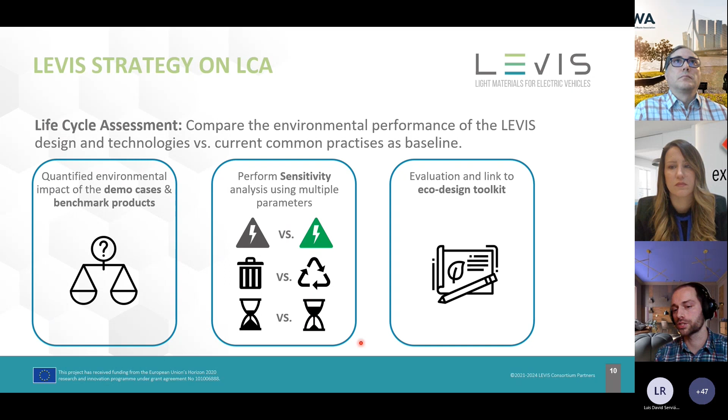If we look at life cycle costing, what are we trying to do? We assess the cost implications from a life cycle perspective. We use the Gabi model for our life cycle assessment, and we use the same process flow diagrams for the LCC as we've done for the LCA. So instead of using emission factors and energy factors, we use cost factors.

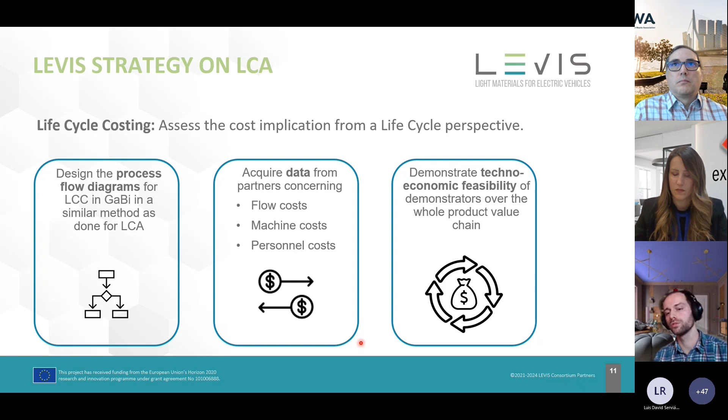We acquire data based on flow cost, machine cost, and personnel cost. This is acquired by the partners themselves who manufacture these components and also handle the end of life of these components. By that, we want to demonstrate that it's not only more sustainable, but also economically feasible to produce these components.

Then the third pillar is our replication opportunities. What we do is look at our LEVIS technologies and establish criteria based on the material properties of these technologies. We use that so later on we have a list of potential replication opportunities, and we can see if these materials could actually be used for these specific components.

We do that through a collective brainstorm session with our partners. These are all expert partners within their fields, and we have a guided brainstorm session to assess potential replication potential for every component, for every LEVIS technology that we have.

If we have a list of all the replication potential case studies, we create a modeling framework and rank them to see which ones are actually feasible and which aren't. As I said before, the goal is that from all the feasible components we could lightweight, the whole vehicle could be 25% lighter through this replication study.

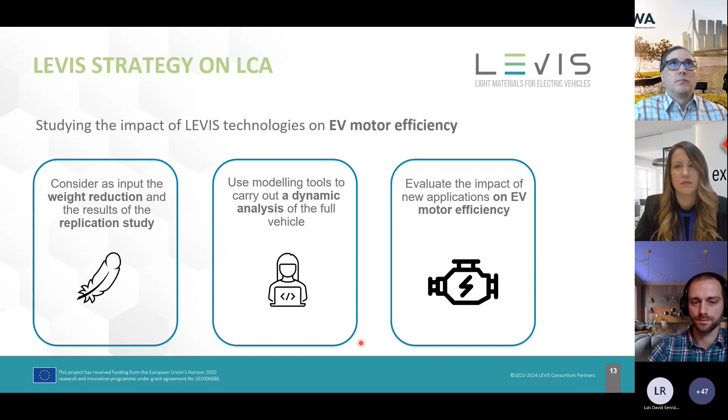We use modeling tools to carry out a dynamic analysis of the full vehicle - how much will it impact the motor efficiency? By that we evaluate the impact on motor efficiency, and we later use that in our life cycle assessment to determine the actual effect of the motor efficiency improvements. So this is in short how we at LEVIS take on life cycle assessment.

If there are any questions, please let me know.

Yes, I think you're Jose. Yeah, we cannot hear you. Sorry, I forgot I was muted.

Thank you very much for your presentation. We don't have any questions from the audience at this moment, but I think now we have some time for those that want to stick around with us for a short discussion and maybe some general questions that have popped up during the presentations.

I myself was a little bit triggered by several comments, also from you but also from other presenters, including Fatigue4Light, on the issue of what happens in future scenarios. We don't have all the information, specifically for vehicles. We have a lifespan that is particularly long, that's 10 years. Through the circularity we try to now implement, we are hoping to make that even longer. So the question I would like, if possible, maybe you can start as well, Floris, by telling us a little bit about how you deal with that uncertainty as to what happens in 10 to 15 years' time when we get back all sorts of materials or other products that maybe by that time will be completely different or maybe even completely out of fashion or just even outlawed.